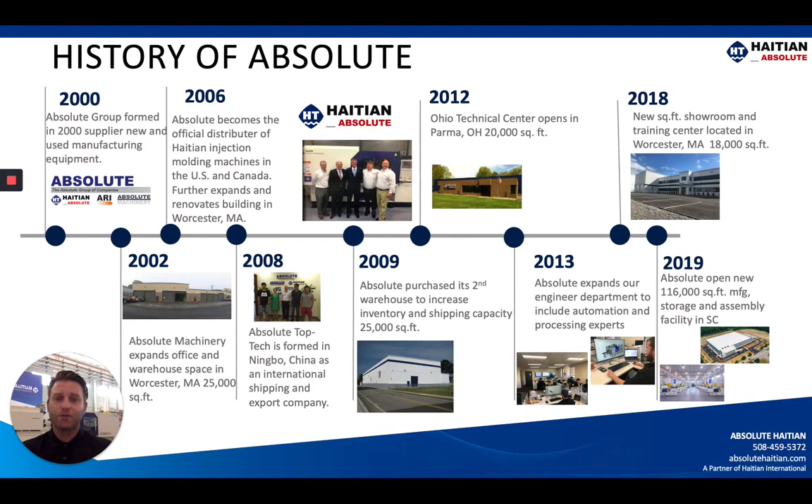Now, the Zhafir family is the high-performance division of Haitian injection molding machinery, and this is a really unique price-performance ratio for high-precision focused applications. We are very flexible with our range of products within this offering. Depending upon your application, these machines range from 44 all the way up to just over 3,700 US tons.

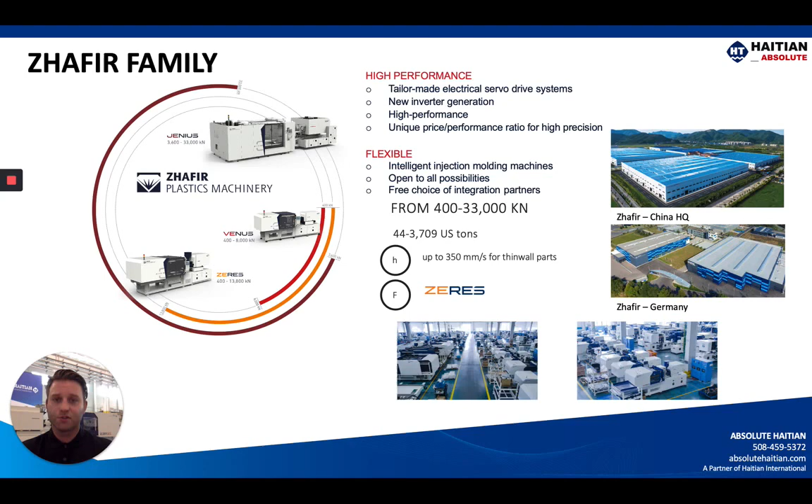We have the Venus machine that we reviewed in the last video, which is the true all-electric. We've got the ZERES, which is the sister machine we're going over today, and also the Jenius machine. Now, the Zhafir headquarters in China, you can see there on the top right, that's where the majority of the manufacturing is done. And you can also have your machine manufactured at the Zhafir Germany facility, where they also do quite a bit of research and development.

Now, the ZERES machine, what applications is this machine good for? Well, it's an electric machine, so it's got electric injection and electric clamp, so that's going to offer you very high repeatability, cycle after cycle, and so this is really a tight tolerance molding solution. So depending upon your application, whether you're a high precision focused custom molder, if you do medical, clean room, packaging, aerospace, optical, you can read.

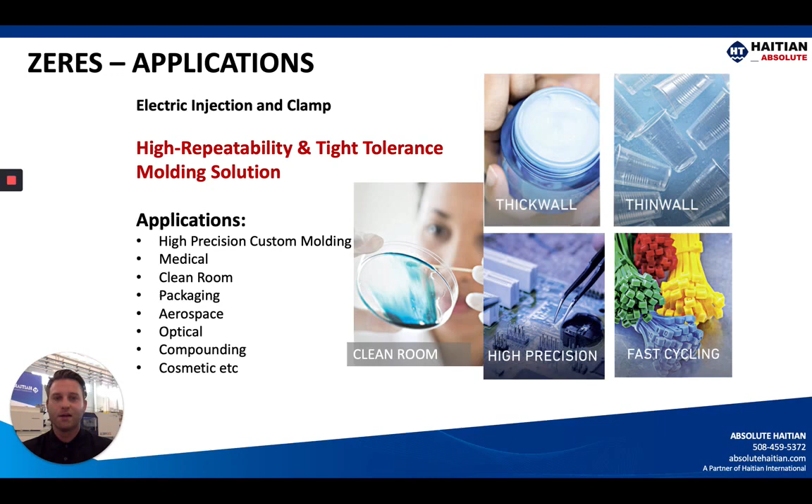But if it's a process-focused job and you really need those tight tolerances dialed in with an electric machine, but need a little bit more robustness and versatility for upcoming or other jobs, this is a great machine for you. The general overview: so again, tight tolerance-focused electric machine. However, compared to the Venus all-electric machine, this has hydraulics integrated where you need them. And the ZERES machine is available from 44 US tons all the way up to 1,551 tons.

And this is an electric clamp and injection unit. So these are both powered by our F6 KEB drives. And we utilize the Sigmatek controller on here, which is something we'll go into a little bit later on. And the NSK ball screw is the focal point of the 5-point toggle clamp, which is a very proven design. It's been around for quite some time. And we also offer some parallel functions to help reduce your cycle time with this machine standard. You have integrated hydraulics for core pull, ejectors, and carriage pull-in cylinders. We're going to that next slide.

But one thing that's huge here with the Zhafir product line, and especially the ZERES machine, we have a huge economies of scale factor here. Haitian produces, on average, and sells each year around 35,000 machines, which is a massive number. So with that massive production number, they have a serious buying factor for each component that goes onto the machine.

They use premium components and world-recognized components on these machines, and the best part is these are standard components, meaning that they are easily interchangeable, so they're not going to go obsolete after just a couple years like some other brands. However, we also have this savings passed down onto you, not only at the purchase point, but also down the road when you're replacing parts.

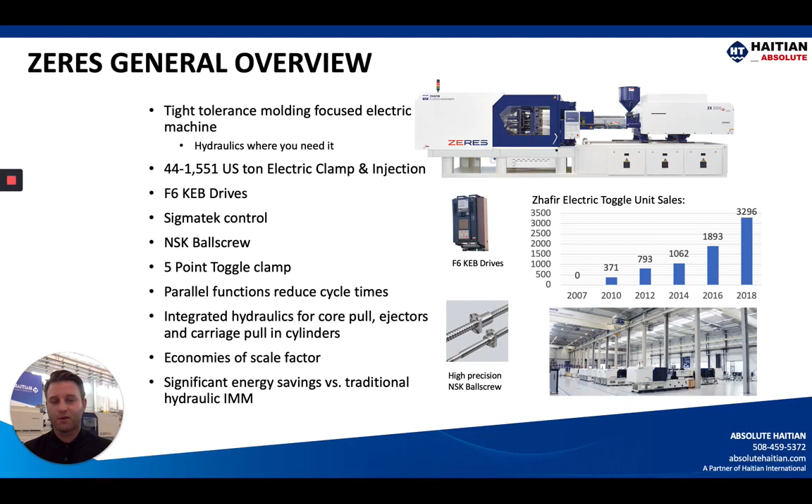Now, the drive systems on the machine, like I said, electric clamp, electric injection. Now, what's actually hydraulic? Here's a great visual right here. So you've got the integrated hydraulic system right here on the first panel of the cabinet, and you have your hydraulic carriage pull-in cylinders. Why? Because historically, a lot of molders, when they're transitioning from hydraulic over to electric, regardless of which electric brand, their main complaint was, well, if I'm doing high pressure molding, I might get some blowback or lack of nozzle contact force on the actual nozzle. And that's because the electric drive might not just be able to maintain all that force and pressure. So your hydraulic pull-in cylinders eliminate that worry or concern.

Now, you also have hydraulic cores on this machine already installed on the non-operator side on the movable platen. This is a very nice feature to have because historically, if you had an electric machine, you'd have to pull around a hydraulic core pull power pack. It'd be hanging off the back of the machine, sucking up floor space, increasing your footprint of the cell. Also, generally speaking, most core pull power packs are pretty messy. They're leaking oil. It's unsightly. This is already pre-built into the machine, directly plumbed in right on your movable platen.

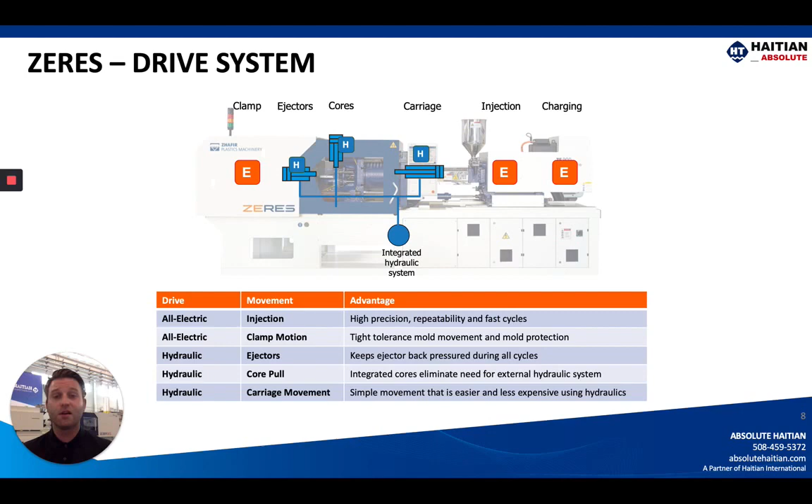And you also have hydraulic ejectors. So this creates a lot more knockout force standard with the machine, whereas historically with an electric machine you might have some issues with knockout force for, let's say, 3-plate molds or spring-loaded molds. This gives you plenty of punch for that knockout force. So not only is this machine more versatile already than a standard electric style machine, but you also are going to see some cost savings because we're reducing the number of drives needed on the machine and replacing them with hydraulics.

Now the clamp unit, like I said, it's electric clamp motion. It's a 5-point toggle design. You can see a good side view without guarding here on the right-hand side. And we also have encoders on our die height adjustment. So it's got auto die height adjustment, but this allows for very precise movement and mold safety protection.

And one thing we like to point out, especially with this ZERES machine, is parallel functions are standard. So you have separate circuits, you have electric and hydraulic. So ejecting on the fly, cores on the fly is standard on this machine. And here's a good picture in the bottom left of the hydraulic ejectors from the rear, and then your cores on the non-operator side of the movable platen. If you need hydraulic valve gates, it's a very easy option to tie in on this hydraulic circuit.

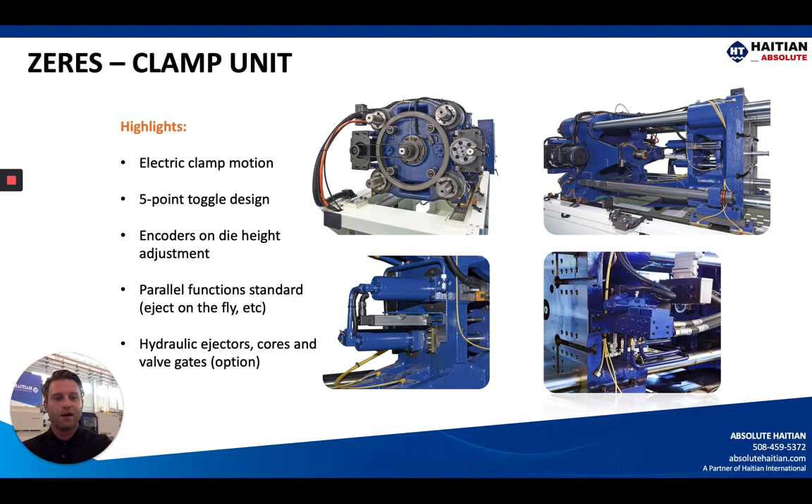And for the injection unit for the ZERES machine, like I said, it's an electric injection unit. It's got a standard swivel function or pivoting function for very easy maintenance items. For the actual injection unit itself, we offer a couple different styles on the ZERES. We have the standard, the high speed, and then we also have the F for packaging style applications. So depending upon your application, this is quite a versatile machine with interchangeable injection unit styles during the actual build process.

So what you'll notice here too is we have some nice linear guide rails for precision carriage movement. This is also a very nicely elevated injection unit, very easy for cleaning. Clearly there would be guarding on this, but you do have some room to get around. But this is a very nice side view that also shows off the dual pull-in hydraulic cylinders for that carriage motion and to prevent nozzle blowback and maintain nozzle contact force.

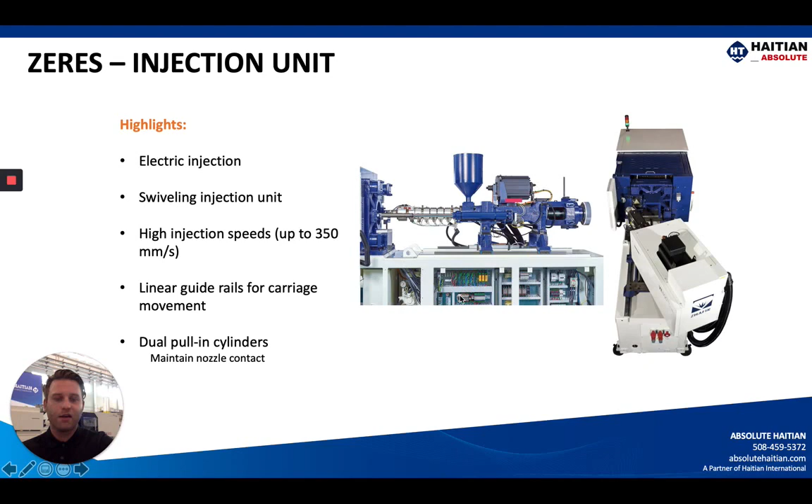You can also see a good side view of the integrated hydraulic system right here on that first panel, and then the very clean and well-organized electrical cabinet.

Now the Sigmatek control, very, very strong and robust controller, very process focused. However, this is a very user-friendly controller. It's not rocket science. It's very easy to navigate page through page.

We even have a simulator that we'd be more than happy to give you as a great training tool, whether you're looking at buying one of these machines, or if you already have the machine and you are taking on some new employees or want to retrain some employees. This is a great tool that we offer for free to our customers.

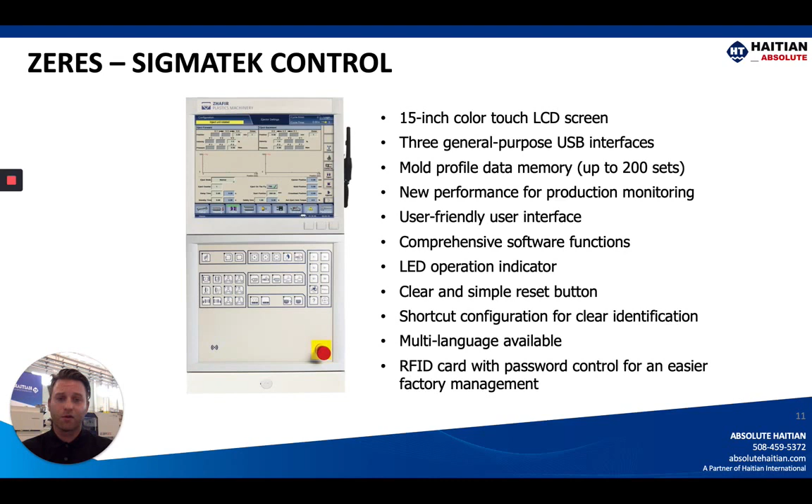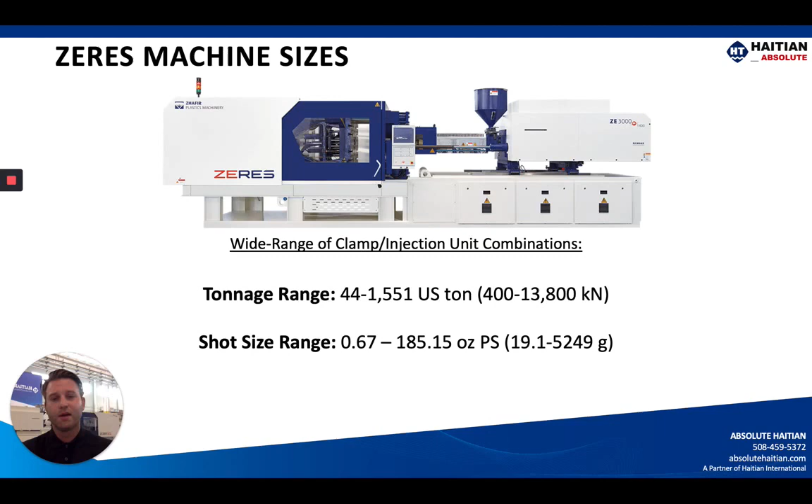Now, the ZERES machine sizes, so like I said earlier, 44 to 1,551 US tons. However, we have a wide range of injection units that we can combine with different size clamps. So depending upon your application, we'd like to review it. Generally speaking, we have around 3 or 4 different injection unit sizes per clamp, and we can upsize or downsize depending upon what your needs are.

Now the ZERES, key takeaways. So again, I've said it a few times, it's an electric clamp and injection unit with integrated hydraulic features. So this is a very robust and versatile machine. So it's a high precision solution, but this can cover a wide range of different applications.

And this also offers a very nice price versus performance ratio for you as the customer. You're getting a lot of machine for your dollar here. And the machines that this ZERES machine competes against are usually in a very high price range. This ZERES machine is at a very, very competitive price point.

Now, you also have a very significant energy savings when looking at a hydraulic in comparison. So, again, we'd be happy to do an energy savings comparison for you in order to help justify the purchase of a replacement machine or a new machine compared to a hydraulic.

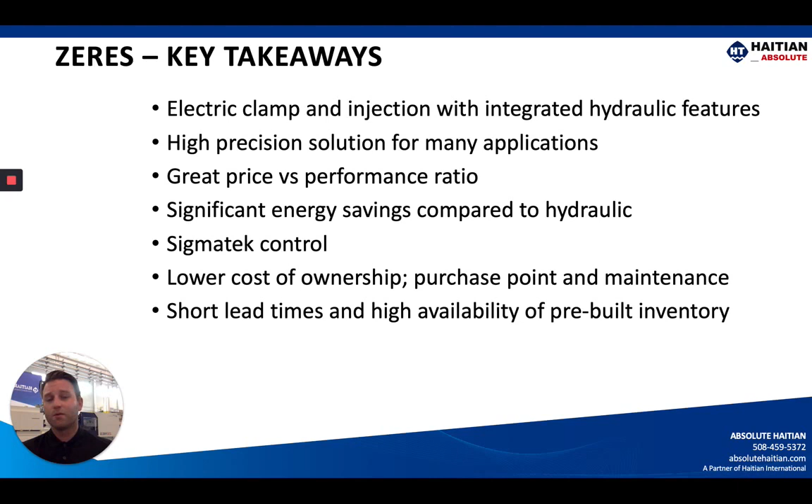Now, we have very short lead times for building these machines from scratch. Let's say you need a special injection unit and clamp combination. However, we have a very large number of machines in stock of our pre-built inventory. So please ask us for a stock list. We typically carry around 120 or so rolling stock machines.